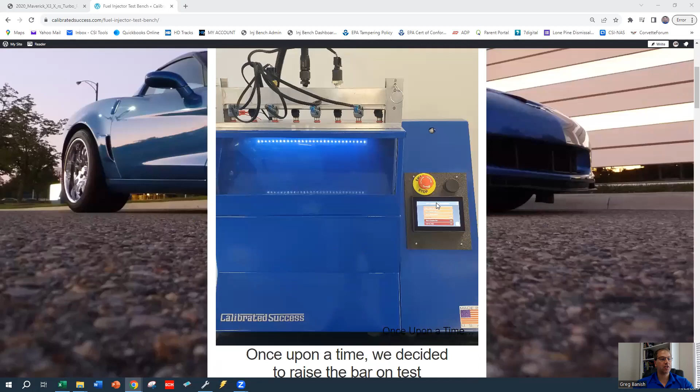This one actually gives us real complete characterization. So we test everything from where the injector just barely opens all the way up into the linear flow rate. And we do that at a bunch of different voltages, so we can get all that plug and play data for your ECU. Here's the really cool part. We've added the UTVs to that. So now, in addition to getting all these other OEM formats, we've added the UTVs.

So without further ado, let's get into seeing how that data goes from our spreadsheet, which is a new interactive tool that you'll have to use with these UTVs, into your tuning software. So today's sample is going to be a BRP Maverick Turbo RR. And so we look that up and we see, well, what are we dealing with here? Because before we start tuning, we need to know a couple things.

The big thing here is that we see down here, it is a 900cc triple cylinder engine. So we got to remember that, because the way that Bosch controller works inside the ECU, it normalizes everything down to a single cylinder basis. And we'll need to know how big each individual cylinder is to get the fuel injector data correct.

So if I minimize that, here is the spreadsheet tool that you'll get from FIC. And you can see here's our data generator. And this is the one that we're using for the BRPs. And you'll see tabs along the bottom here. These are for the various injectors. So right now I'm on the 1200cc injector, part number 6040. This is the sample we're going to use. So we're going to put 1200cc injectors into a stock Turbo RR.

So we need to start with these four things over here on the left-hand side of the screen. So number one, we need to enter our engine size. So that engine, as we saw, is a 900, not 950. So we'll type 900 in, hit enter. And you see, as soon as you change that, some of these numbers over here on the right are changing as well. We know that is a triple cylinder engine. So we need to spread that 900 across 3 cylinders. Once again, the numbers change over here.

No worries. We go to step 2, rail pressure. Stock is 450. But we have the ability to select that. And if you're running your own fuel system at a different pressure, like 3 bar or 4 bar, that can be selected. And as you select that, sometimes you'll see these numbers over here change as well. But we're going to stick with the stock 450 kPa system. The other thing is that we can choose between a returnless and a return fuel system. So factory is a returnless system. We need to make sure that is selected so we get the right numbers over on the right-hand side.

And finally, ethanol content. Because these are not true flex fuel systems, we really basically tune it for one fuel chemistry. So pump gas is about 10%, and that's what most of our characterization work is done around. So we give you the number, we default to that 10%. But if you were blending your own fuel and you knew for sure you had 85% ethanol, you can type that in. You can see the numbers will change.

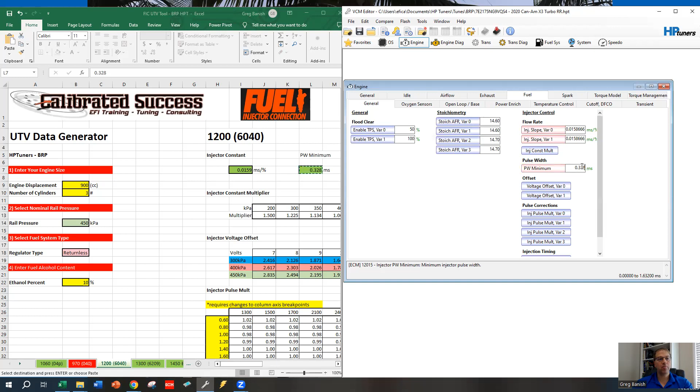Next up is our minimum pulse width. So I'm going to Control C to copy that. We're going to type that in over here, Control V. That's our new minimum. And then we get into the injector multiplier. So this is a pressure compensation curve. And you'll see that the factory has numbers in there almost identical to us.

Really, if we keep the returnless system, these numbers basically aren't going to change a whole lot. But just for completeness, we've included it. And we just want to double check that we have the same breakpoints in our table. So 200, 300, 350, 400, 450, 500, and 550. Same breakpoints here. So we can just copy these by highlight, Control C, come over here, Control V, and paste those in, and they're done.

Now, they didn't change a whole lot because we're basically using the same type of fuel system, but we give it to you anyway. Next up is your voltage offset. Now you'll see, once again, they have two variants, just like they did for the flow rate. So let's open that up. We're going to double check our axis breakpoints here. So 7, 8, 9, 10, 11, 13, 14, 16. And in the spreadsheet, I have 7, 8, 9, 10, 11, 13, 14, 16. So no reason to outsmart that.

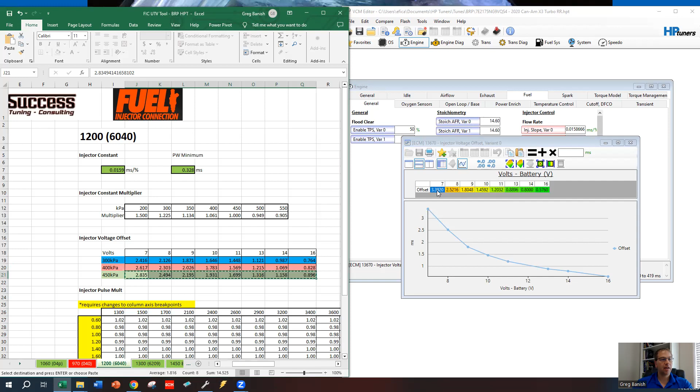We're going to grab the row that matches the pressures that we're actually working at. So we're at 450 kPa. I'm going to Control C to copy that. I'm going to come back over to HPTuners, Control V to paste that in, and it's done. We'll repeat that process on the other variant just for completeness. So now both of those are updated.

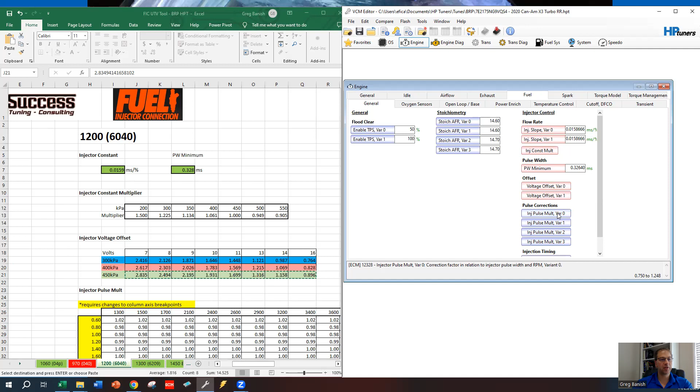And the only thing it really leaves for us is this injector pulse multiplier, which they call pulse corrections over here, or injector pulse multiplier. You'll see there are 4 different variants of this. And from the factory on a Bosch controller, this table's a little funny. This table is kind of the fudge factor that the OEM uses to account for a number of different things.

Some of them are injector related, and some of them are fuel rail related, or some of them might even be airflow related. It's kind of the catch-all fudge factor, but there is still a volumetric efficiency table in the ECU. So we are going to do our heavy lifting on our actual tuning over in the VE surface. We're going to put values in this table that fix the non-linearity of our fuel injector. And so that requires that we're going to grab the new values here.

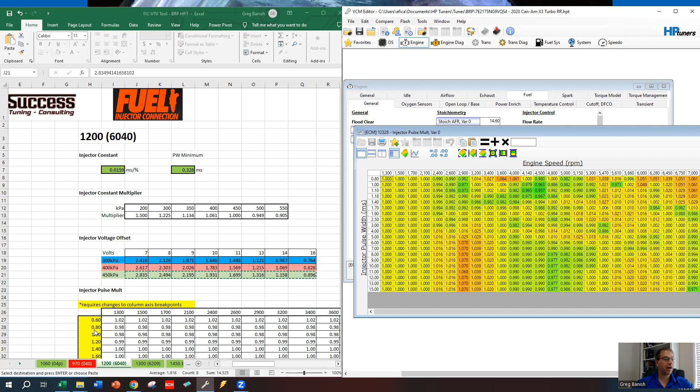And in order to do that, I've got some changes here. You see, it requires changes to the column axis breakpoints. So let me get that and scroll down a little bit so we can see where my breakpoints are. I added a little bit more resolution in some places here so that the areas that we use get more resolution. And so what we're going to do is go back to HPTuners. We're going to right click. We're going to go to that row axis and we're going to edit it. And so now we can see those breakpoints that were in the table. They're laid out this way. And we're just going to type in our new ones.

So we start with 0.6, and then we go to 0.8, then we go to 1, then we go to 1.2, 1.4, 1.6, 1.8, 2, 2.2, 2.5,

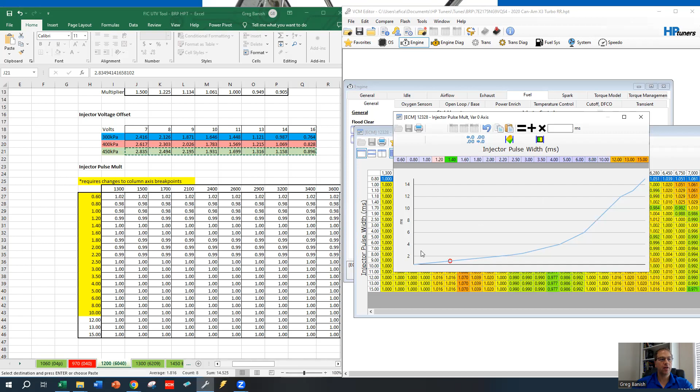3, 3.5, 4, 5, 6, 8, 10, and then we have 12, 13, 15, same as them. So now with those entered, we will have changed the vertical axis breakpoints, and you see they show up here in the software. Now we can just go ahead and grab all of our data from this table and get our non-linearity of the injector compensated correctly.

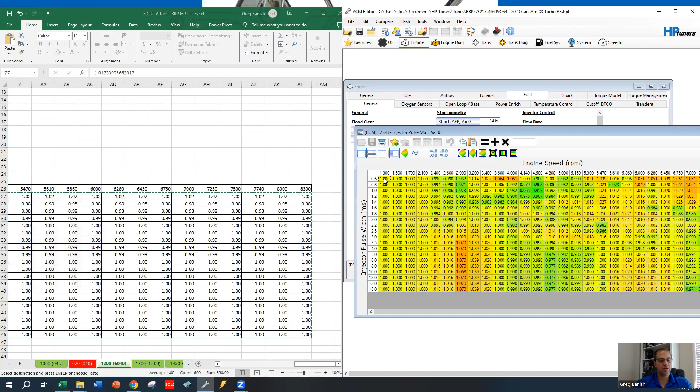So we're going to copy all of this by highlighting it, Control C. We're going to go back into HPTuners in that top corner, Control V, and paste it in. So now you see lots of different colors because we got rid of all the wonky up, down from the factory stuff. Their fudge factors have been erased. We start with a 1.0, a clean surface that matches what our fuel injector really does.

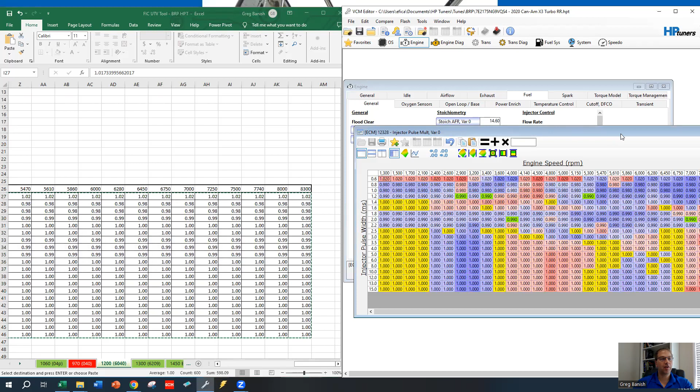And if there's any volumetric efficiency stuff that we have to move around, well, we'll handle that in the VE surface. So we now have a new injector pulse mult that fits our injectors in their nonlinearity. Now that's for variant 0. We replace the same things in variants 1, 2, and 3 here just for completeness. And after that, you're ready to get tuning.